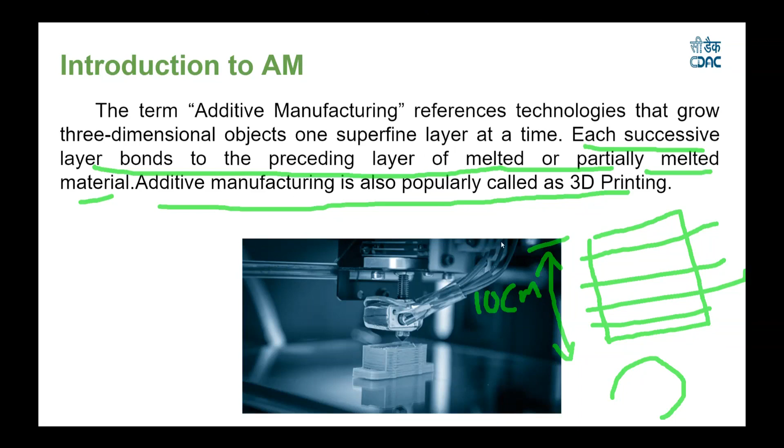So that's what additive manufacturing is like: a layer by layer manufacturing process where each layer gets printed on top of the other, melted or partially melted. After printing one layer, it solidifies within a fraction of a second, then the next layer gets deposited on the previously printed layer, and the process continues until the complete model gets built.

Coming to the evolution of additive manufacturing: it was evolved between 1984 and 86 by Charles Hull, founder of the company 3D Systems, a pioneer in desktop or industrial grade polymer printing, meaning thermosetting or thermoplastic polymers. He founded 3D printing through the technology called stereolithography, which is a photopolymerization technique.

Here you use a liquid resin, a thermosetting polymer resin, as raw material, and a UV light source or high intensity light as the solidification source. You project that light onto the liquid resin, and in that way the resin gets solidified. So additive manufacturing was founded between 1984 and 86 by Charles Hull, who is also the managing director of 3D Systems company.

So in 1992, they built the first 3D printer. In 1999, they started using 3D printers for medical applications. Then in 2000 they printed the miniature of a kidney using a 3D printer.

In 2006, the patent that was filed in 1984 expired after 20 years. So from when the patent got expired, there was a large boom in additive manufacturing.

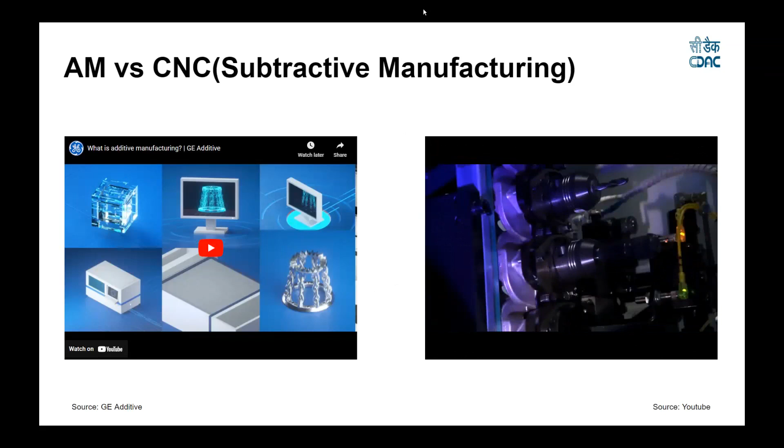If you see a part like this, it's not at all possible unless you go for multiple conventional manufacturing processes. Those kinds of parts which are very intricate in shape can be 3D printed easily. That's the major advantage when going for the additive manufacturing process.

So we cannot say that additive manufacturing can replace subtractive manufacturing, but it can add value when there are complex parts which you are going to manufacture.

Here you can see the differences between the additive manufacturing process and CNC or conventional manufacturing process. In additive manufacturing you develop the model layer by layer by adding material. In conventional manufacturing you remove material from a chunk or block.

Here material is added as the part gets built. Here material is removed as the part gets built. So you have seen both in the video, right?

Here you get more geometrical freedom, whereas in conventional manufacturing we have less geometrical freedom compared to additive manufacturing. Here you have no wastage of material or very less waste of material, whereas here you have very high waste of material, as you have seen.

So we have to remove the material to get the desired shape of the object.

Additive manufacturing is suitable for low volume production, while conventional manufacturing is suitable for higher mass production. The manufacturing rate of additive manufacturing is very low, as it's still in the development stage, so it is less compared to the conventional manufacturing process.

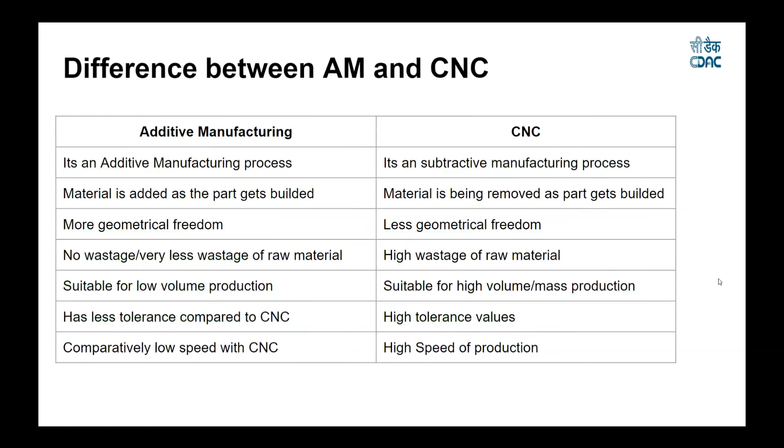Now looking at the advantages, the first advantage is lead time reduction. When you are going for any kind of product development, in the process of design iterations, it requires a lot of time to get the part in hand with conventional manufacturing process. But when you adapt the additive manufacturing process, you can print your part within no time.

If your design is ready by end of the day, you can start printing in the evening, and by the next morning your part will be 3D printed. In that way, you can reduce the lead time of product development.

Here you can also do topology optimization, which refers to optimizing the weight of the part. There are simulation software where you can optimize the weight of the part without losing any strength parameters, so you can reduce the weight of the part. That is one advantage.

So weight reduction, as I said, and part consolidation. If your assembly has around 8 to 10 parts, with conventional manufacturing process you get more number of parts because of the constraints involved. But when you adapt additive manufacturing in your design cycle, you can consolidate those 8 to 10 parts into 2 to 3 parts, reducing the number of parts in an assembly.

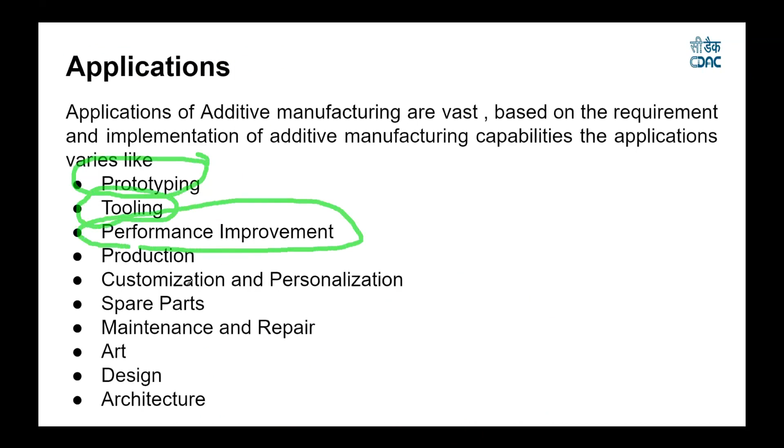You can go for mass customization, you can go for personalization, you can use it for spare part maintenance and repair. Even you can do repair on a 3D printed part, like if a large part got damaged, you can do the DED process - what that is, I will show in the next couple of slides. If there is any broken area in a part, you can deposit the material there, and in that way repair the old part also.

Then you can use it in art, design, architecture. There is no specific industry where we cannot use 3D printing, other than cloth manufacturing or something, but mostly in physical objects you can use 3D printing in all applications. So these are the applications of additive manufacturing.

Next, coming to classification of additive manufacturing process based on ASTM standards, which is our major topic. As per ASTM standard, there are seven different types of additive manufacturing technologies. Among that, we have material extrusion, sheet lamination, binder jetting, VAT photopolymerization. VAT photopolymerization is the first technology, invented by Charles Hull in 1984, as I said. He invented stereolithography, which is based on liquid resin. VAT means resin tank, what we call.

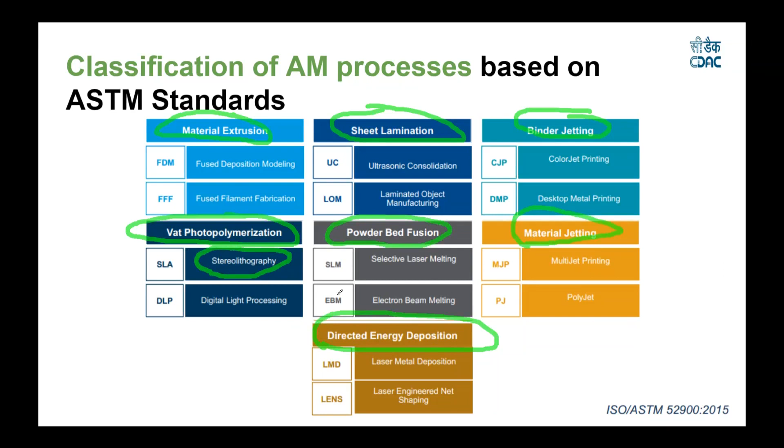Next we have powder bed fusion. Next we have material jetting. Next we have directed energy deposition. So there are seven different types of technology. The building process remains the same in most of the technologies. The major difference between all these seven technologies is the raw material which we are going to use.

If you see here, in material extrusion we'll be using the raw material in wire form. If you are going for VAT photopolymerization, we use raw material in resin form, in liquid form. If you are going for powder bed fusion, we'll be using raw material in powder form, like metal powder. Based on the raw material, we have to choose a suitable solidification source to develop a 3D model. In case of material extrusion, we'll be having material in wire form, we'll be melting the wire and depositing it in a layer by layer process.

When you're going for vat photopolymerization technology, you'll be having a raw material in resin form. To cure that resin, we require a solidification source, either a high intensity laser or UV light. Since thermosetting polymers are light sensitive, when you're projecting the light on that liquid area wherever you want to build the part, it gets solidified. So in that way you'll be developing the part.

If you go to powder bed fusion, since we are using metal powder, it is selective laser melting or electron beam melting. Here we'll be using a laser, like a CO2 or fiber laser or some other lasers, to solidify. In electron beam melting, you will be using an electron beam to melt the powder and solidify it.

So in every technology, the build process remains the same. You'll be having a material that gets deposited on a build platform, it gets solidified, and the build plate will be lowering, and on top of that, the next layer will be deposited. The process continues similarly in all the technologies. Just the raw material we use and the solidification source which solidifies the part will be changing. That is the major difference between all seven technologies.

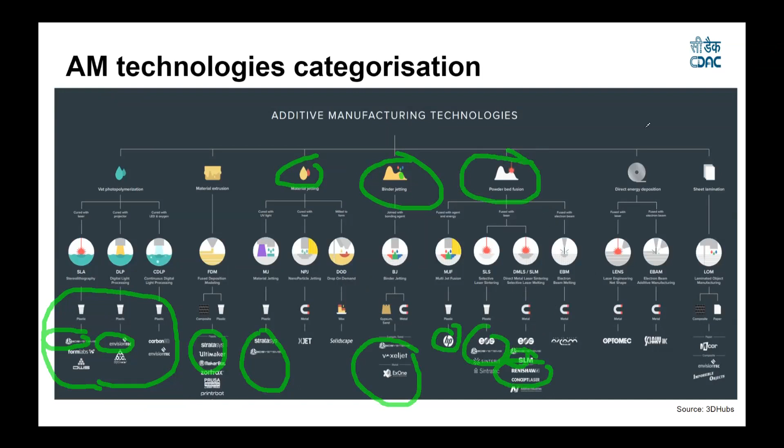For binder jetting, we have Voxeljet and ExOne. These are the printers which can use sand also as a raw material, and these are the pioneers in that technology. Next, powder bed fusion, we have HP, EOS, 3D Systems, SLM, Renishaw. These are the pioneer brands in the technologies. Similarly, we have DED and sheet lamination.

Starting with material extrusion: as I said, we'll be having a raw material in wire form. In the material extrusion process, you'll be having a raw material which we call filament. We'll be having a roller which will be pulling the filament inside towards the nozzle. The nozzle is the area where you will be having a thermocouple which will be heating the filament.

Based on the filament type, there are different types of filaments, it will heat the filament in the nozzle and deposit it wherever it is required. This is what happens in case of FDM, fused deposition modeling, or in some brands like Ultimaker, they call it FFF, fused filament fabrication. So the filament is getting inserted, pulled inside, melted, and deposited.

Fused deposition modeling, or FDM, is a layer additive manufacturing process that uses production-grade thermoplastic materials to produce both prototype and end-use parts. This technology is known to accurately produce feature details and has an excellent strength-to-weight ratio. FDM is ideal for concept models, functional prototypes, manufacturing aids, and low-volume end-use parts. The FDM process begins by slicing 3D CAD data into layers. The data is then transferred to a machine, which constructs the part layer by layer upon a build platform.

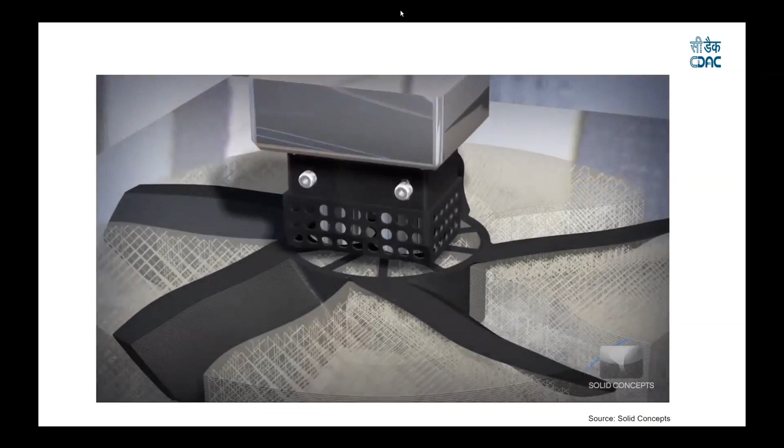Thin thread-like spools of thermoplastic and support material are used to create each cross-section of the part. Similar to a hot melt glue gun, uncoiled material is slowly extruded through dual heated nozzles. The extrusion nozzles precisely lay down both support and thermoplastic material upon the preceding layers. The extrusion nozzle continues to move in a horizontal XY plane while the build platform moves down, building the part layer by layer.

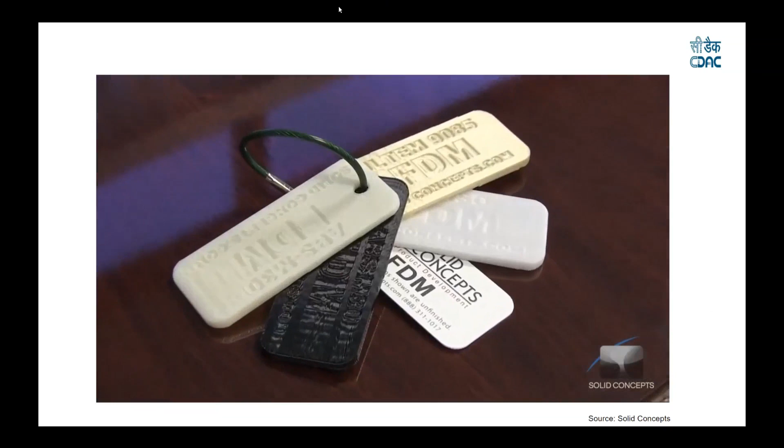The finished part is removed from the build platform and cleaned of its support material. Raw FDM parts have visible layer lines. However, service providers such as Solid Concepts offer multiple finishing options to create smooth, even surface parts including hand sanding, assembly, and cosmetic paint. Since FDM parts are constructed with production-grade thermoplastics, including ABS, polycarbonate, and Ultem, they are both functional and durable. FDM is utilized in a number of industries, including aerospace, automotive, industrial, commercial, and medical.

So as you have seen in the video, that's how the FDM process works. You will be having two different extrusion heads, one for model material and the other one for support material. The white color part which you have seen is the support material, the black color one is the actual model material.

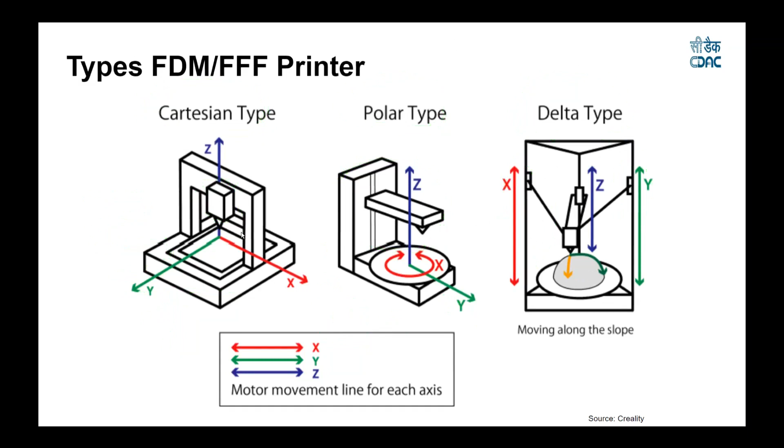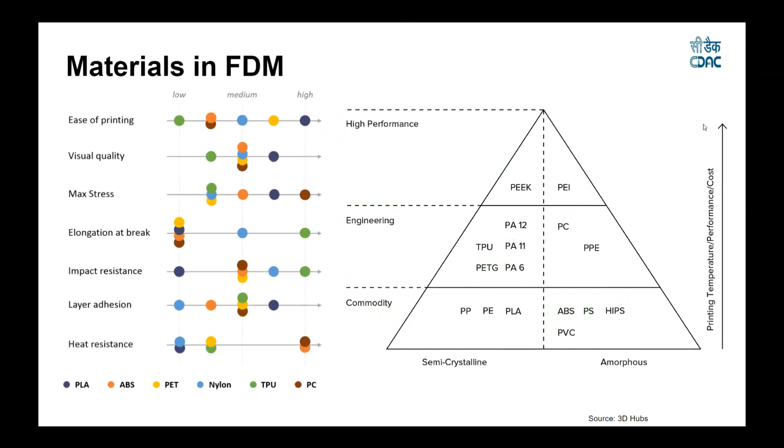Next, coming to VAT polymerization, which is the very first technology in case of 3D printing. Here we'll be using a liquid resin. As I said, the raw material and the solidification source only change, the other setup of the 3D printer will be the same.

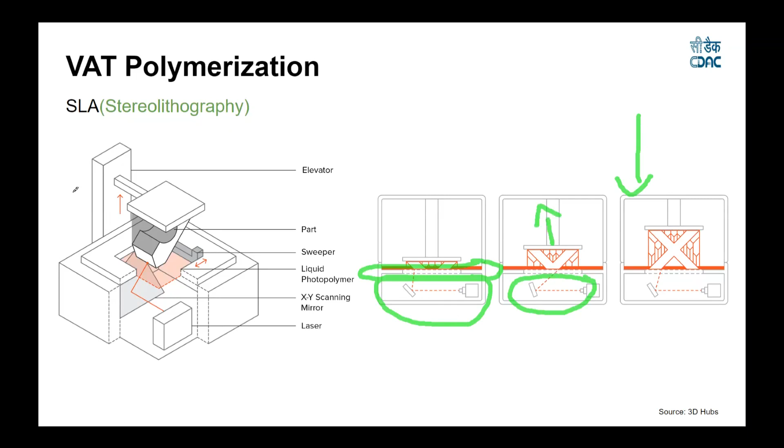Here you can see, there's a high intensity light source at the bottom of the 3D printer, or in some setups it will be on top. In this we also have two different processes, which I'll explain next. You'll be having a liquid resin, the orange color one is the liquid resin we have here. After completing every layer, your build plate will be raising up, and the next layer gets built on the previously printed layer. So this is the printer setup we have, and this is called the elevator.

Next we have the 3D printed part, this is the build platform. Here we have a sweeper, which will be leveling the liquid. Here we have liquid polymer, in orange color, and you will be having XY scanning mirrors, which will be deflecting the light source or solidification source wherever we want to solidify the part, and we will be having a laser chamber here. So this is the setup of VAT polymerization technology.

So here you can see the video of how it happens.

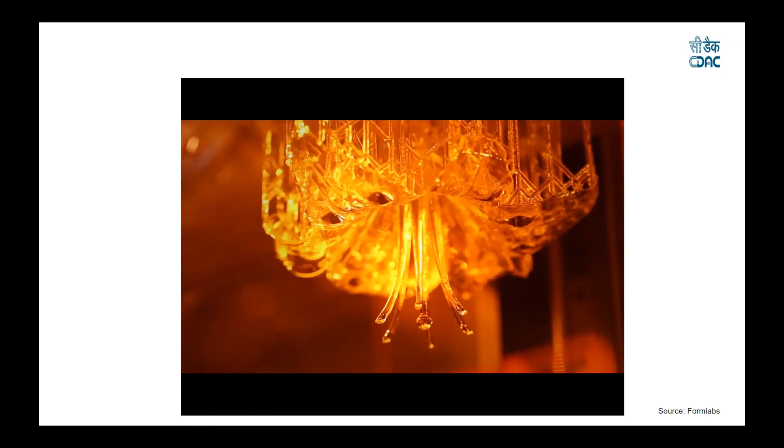The Form 1 Plus is a stereolithography 3D printer. Today, we're going to take a look at how it works and put it to the test against parts from an extrusion-based machine. Let's start by taking a closer look at the printer.

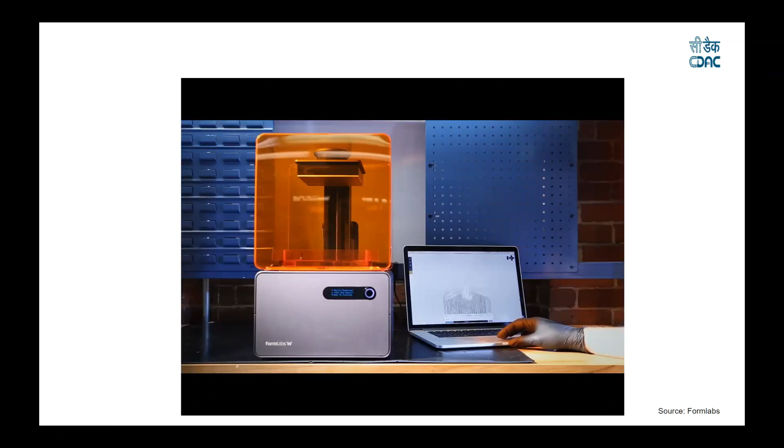When we open up the light-blocking cover, we can see a build platform inside. This metal plate is where the parts are made. Underneath the build platform is a resin tank. This clear window gives the ultraviolet laser a path to cure the resin. To start a print, we'll upload a file and fill up the resin tank to the indicator line.

You can see the laser passing back and forth inside, hardening the liquid plastic.

We'll take our printout and wash it in rubbing alcohol to get the excess resin off. The flower comes with supports on it, and we'll snip them off to finish the piece.

Stereolithography is known for producing extreme detail, with layers down to 4 times finer than a human hair.

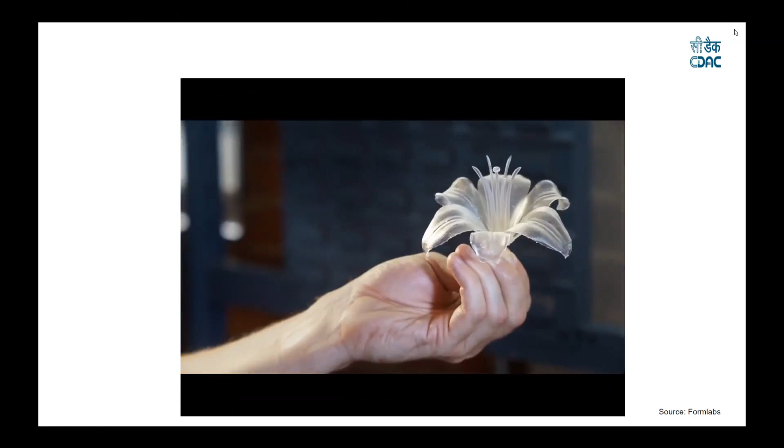The Form 1 Plus lets us take advantage of a library of materials, so we made some other parts to show what these resins can do. A castable resin gives jewelers and engineers an inexpensive way to produce metal parts. This flexible resin is great for simulating different textures, and as we can see, this tough resin can really take a hit.

Now let's compare how the Form 1 Plus parts stand up against a filament printer. The stereolithography parts come out nice and smooth, and we can see the ridges on the cup printed with filament when comparing the FDM and SLA 3D printers.

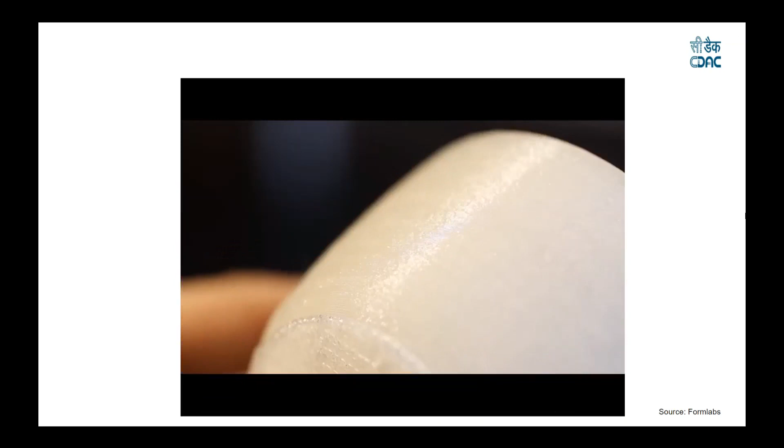When we break this sample piece, you can see that filament parts quickly snap along the layer lines. The SLA process creates a chemical bond, so our prints take much more force.

This is a bottom-up type of 3D printer. Today we took a look at how stereolithography printers work, the types of resins they can print with, and what makes the parts stand out against other desktop machines.

So as you have seen, this is how the SLA type of VAT polymerization works. A layer of liquid resin will be deposited and solidified using high intensity light, and the next layer gets deposited again.

Your build plate will be lowering down, or it will be going up, based on the printer setup we have. In some 3D printers this is top down, where your build plate moves from top to bottom with the laser setup on top, and in some printers it's bottom up. Here the build plate moves in the upward direction after completing every layer, with the complete laser setup at the bottom. Now I'll show both 3D printer types.

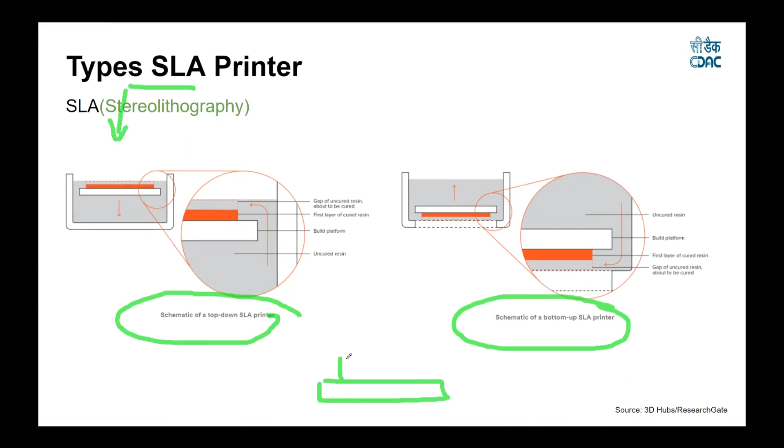So here you can see one is top down 3D printer, one is bottom up 3D printer. In top down, you have a laser setup at the top. After completing each layer, consider this is your build platform and this is your model. After completing one layer, your build plate goes down, the recoater spreads the next layer of liquid resin, and the solidification source solidifies wherever required. It continues this way until the product gets built. That is what happens in top down.

Coming to bottom up, it's mostly the same setup, but here this is your build platform, and this is your model after completing a particular layer. Your build plate lifts up within the resin tank itself, which is full of resin. The next layer gets solidified by the light source present at the bottom of the 3D printer setup. In this process, your complete model is submerged inside the resin tank. That is the main difference between top down and bottom up.

So here we can see the major differences between bottom up and top down. Bottom up type 3D printers are low cost and widely available, while top down technology has very large build size. Build size means the platform on which the 3D model is developed. Bottom up printers have less build area compared to top down. Top down has very high build area and faster build times.

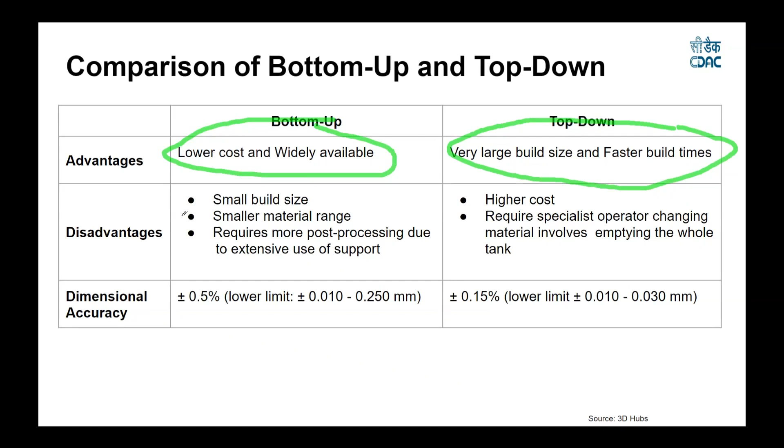Disadvantages of bottom up: it has smaller build area, so you cannot build large models. Next, it has a smaller material range, since these are cheap printers we don't get a wide material range. It also requires more post-processing time due to extensive use of support.

In this bottom up type, since your model is lifting from bottom to top, consider this is your build platform on which your model is built, you are moving against the gravitational force. So to hold the model to the build plate, we need more supports, which requires more time to remove the supports too. That is a major drawback of bottom up type, along with not having higher build area.

That is one more reason, because if you have higher build area, you can print larger models. To stick larger models in bottom up type, it has to use extensive support to hold those models to the build platform, which requires a lot of support, and in return increases the post processing time.

So that is a major drawback, which is why we don't have higher build areas when going for bottom-up type 3D printers. In top-down, we have disadvantages like higher cost since it has a larger build area. The cost of the printers will be high, and we require a specialist operator for operating these machines, because we have to store the material properly and preheat it before 3D printing. So all those challenges we have, and we require a specialist operator.

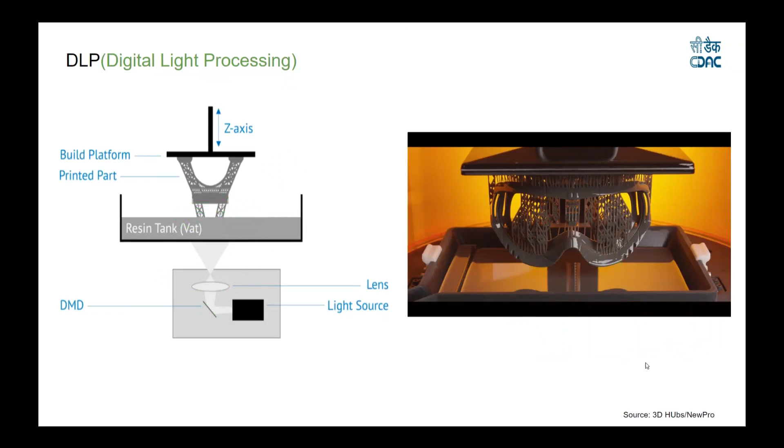The rest of the construction will be the same, as it too has top-down and bottom-up types. This is a bottom-up type, and the other one has top-down. The raw material and the solidification source will be the same, but here you will be solidifying the complete layer in a single go. So you'll get a faster build, but the quality will be less when compared with SLA technology. Now you can see the video here.

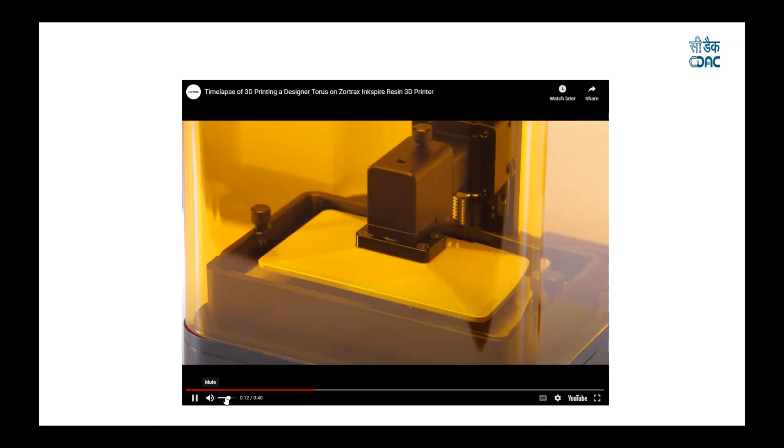This is a bottom-up type of printer, and this is the liquid resin being poured. The build platform will be dipped inside the resin tank and will be lifting up. Here you can see in the video we have a lot of supports holding the part, since we are lifting it against the gravitational force, so we have to do a lot of post processing as well.

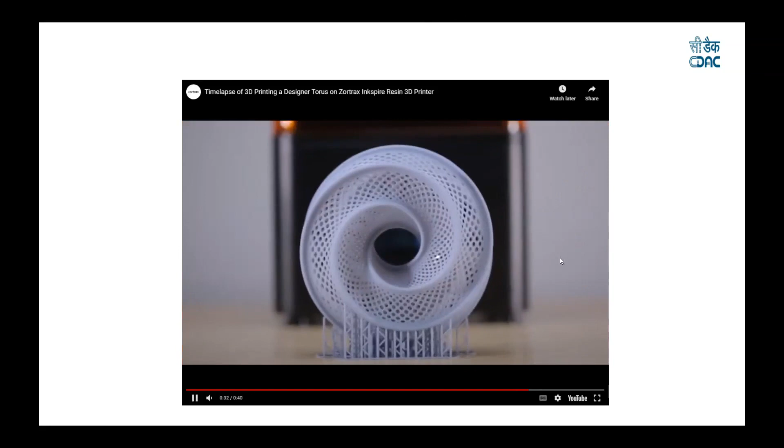That's how the process happens in DLP. The construction of the 3D printer will be similar to the SLA process itself. Only the projection of the solidification source will be different; the rest of the things will be the same.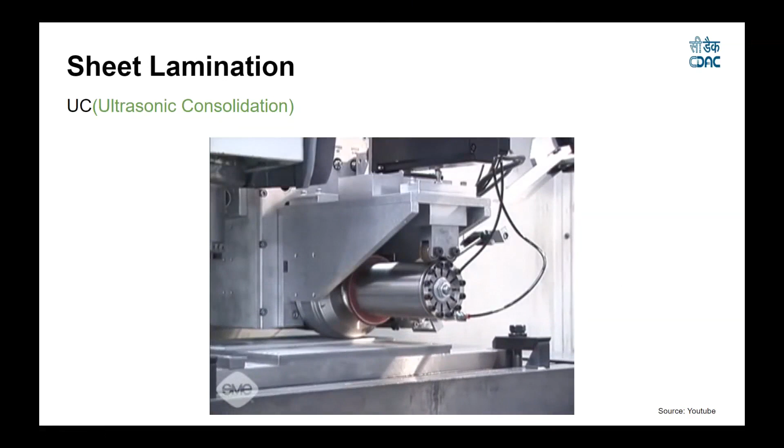Ultrasonic consolidation produces direct metal parts from CAD data by ultrasonically welding layers of coiled aluminum foil strips to a prepared metal substrate. As the foil strips are placed on the substrate, a tool called the sonotrode uses high-frequency vibratory energy and moderate force to disrupt the interface surfaces, inducing interatomic attraction and metallurgical bonding between the foil and the substrate surfaces. Once ultrasonically welded, the layer is then milled to the cross-sectional shape defined by the CAD data.

This process removes material through a general conventional manufacturing process. The wastage of material is more, but you can get the detail of a previous layer or complex parts when going for sheet metal lamination or ultrasonic lamination, removing excess material continues until the part is complete.

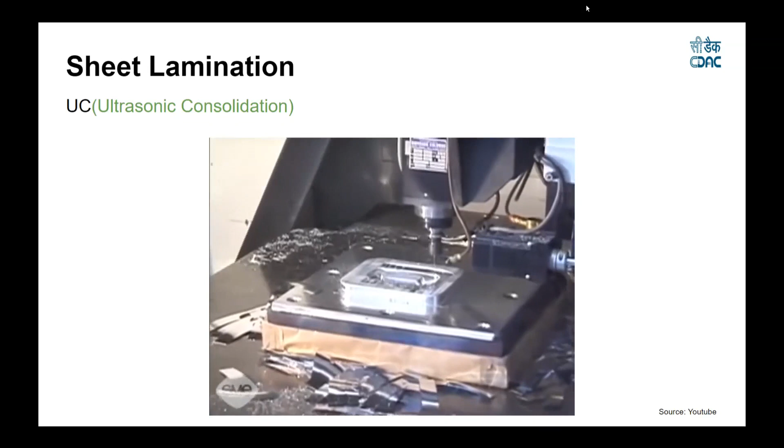Like other rapid prototyping processes, ultrasonic consolidation also allows for the buildup of complex geometries, overhangs, and enclosures within a part. Ultrasonic consolidation can be used to bond a variety of similar and dissimilar metals, as well as certain ceramic metal combinations.

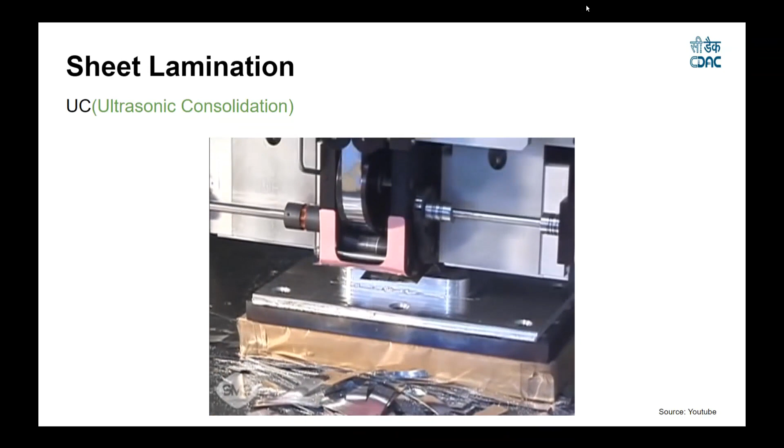As you have seen, it is a combination of conventional and additive manufacturing process. Here the sonotrode deposits the metal sheet, then it is milled wherever required. If you compare conventional manufacturing and additive manufacturing, here you can get complex geometries, but the waste of material remains the same. That is about sheet metal lamination.

Next we have sheet metal laminated object manufacturing. It is also similar, but here you use a laser to cut the part wherever it is required. You can see in the video.

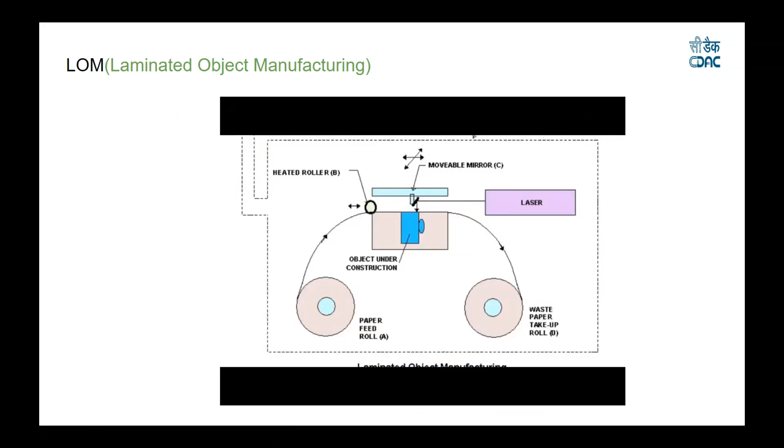This is the construction of the laminated object manufacturing machine. Here you will be cutting the material wherever it is required, and that way your complete model is built.

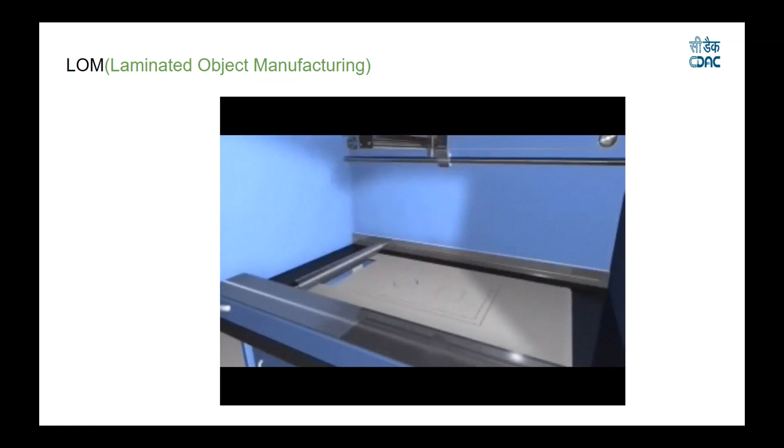After completing one layer, the next layer of sheet metal paper is shifted onto the previous printed object, and the process continues until your complete model gets developed. But here the wastage of material will be the same as in sheet metal lamination - the wastage will be more, but you can also achieve critical geometries when going for sheet metal lamination.

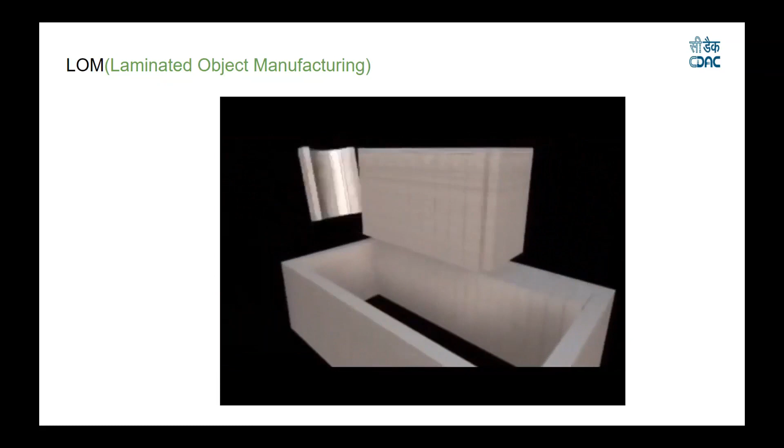So in this process, the laminated object manufacturing process works similar to sheet metal lamination.

Next, coming to powder bed fusion. This is one of the widely used technologies for metal additive manufacturing process. In that we have two types: one is selective laser melting, SLM process, and we have one more called EBM, electron beam melting.

The construction of the 3D printer remains the same, as you can see. Here you will be having a build platform which will be raising up and lowering down after completing every layer. Here we have the dispenser duct, where it will be having the raw material. After completing every layer, this recoater will be spreading the material on the build platform, and excess material will be dumped here into the collector tank. Then the next layer will be solidified, and after completing one layer, the next layer of powder metal will be deposited by the recoater.

So here you have the solidification source. We are using laser as the solidification source, either it might be CO2 laser or other lasers. And here you have a scanner which will be deflecting the laser direction wherever you have to solidify the part. We also have to maintain inert gas inside the chamber, either argon or other inert gases. So this is the construction of the SLM process.

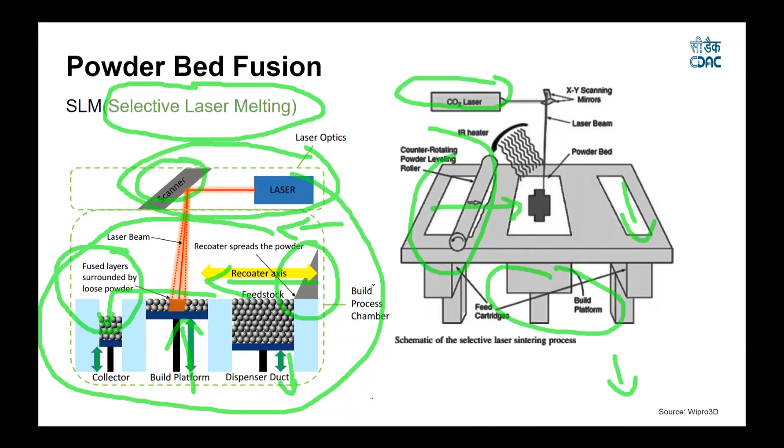Here you can see we have a CO2 laser. This is the recoater we have, which will be spreading the material, and this is the collector tank where it will be collecting the excess material after completing one layer. This is your build platform which will be getting down such that the next layer of powder can be deposited. The process continues until the complete metal part gets 3D printed. You can see in the video.

So this is the slicing software we have. We are importing the STL file, and after importing it, we have to set all these parameters, like what kind of supports you want. Here we have support definition, optimization, all these things. You'll be learning that in detail during GD&T training or bridge course.

So you can multiply the parts also inside the slicing software, and you can arrange the parts on the build platform. You can arrange the support structure, whatever kind of support structures you want. So this is the construction of the 3D printer.

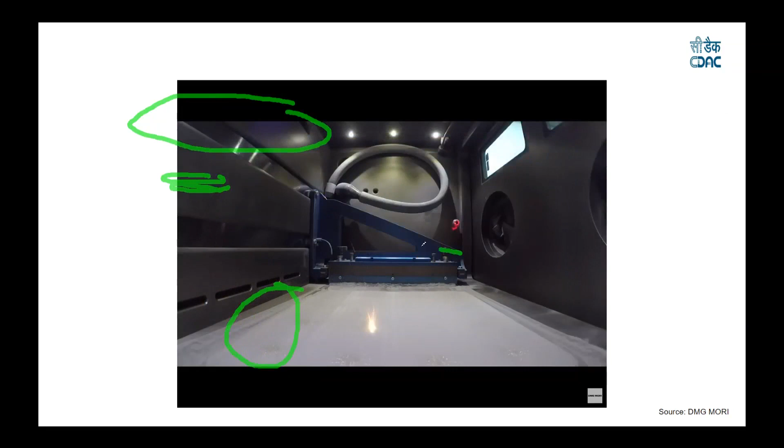So here you can see, after completing one layer, your laser is curing the part. As we have multiple parts, the laser moves to every point and solidifies it. After completing one layer, this is the recoater we have here, where we have excess powder, and it will be spreading material on this platform.

So here we have to maintain the inert gas inside the chamber, it might be argon or other inert gases. So after completing one layer, your recoater is spreading the powder here, you can see.

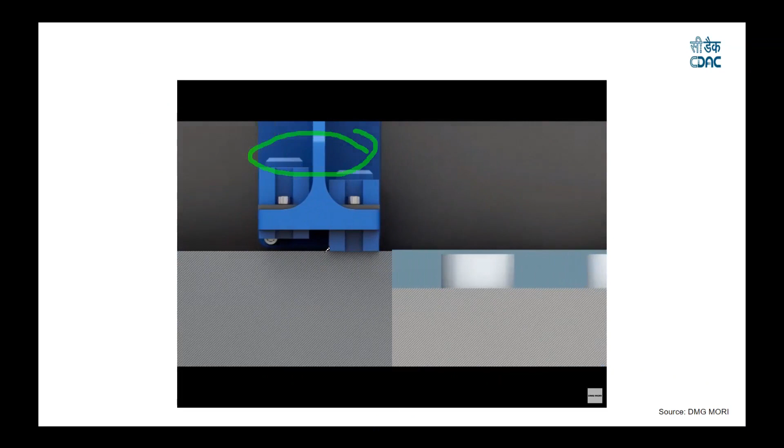The collection tank we have, so this is a dual type, but in recent 3D printers we have a collection tank on the other side itself, so that it can optimize the travel time in the other direction. So here it is spreading the powder.

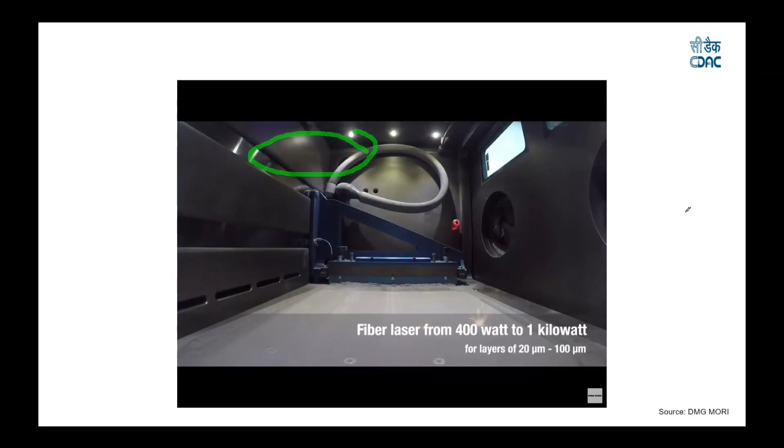You can see in the video how the part is going. So here you are using a fiber laser which is of 400 watts to 1 kilowatt, based on the raw material or powder you are going to use.

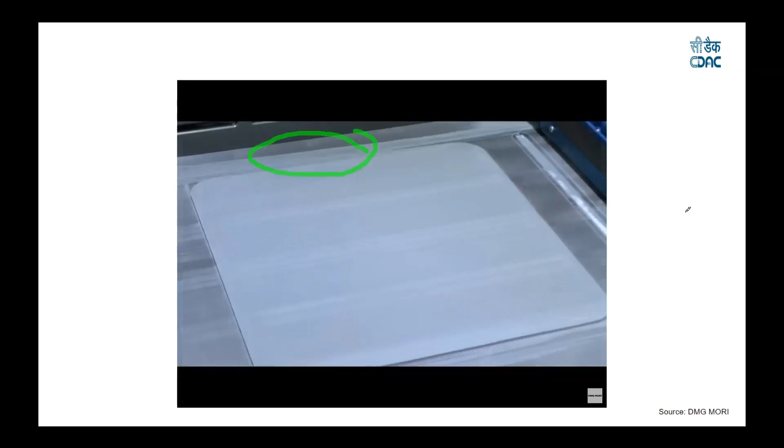After completing, we have to remove the powder using those slots we have, and we have to take out the part. So you can reuse the part, reuse the powder also.

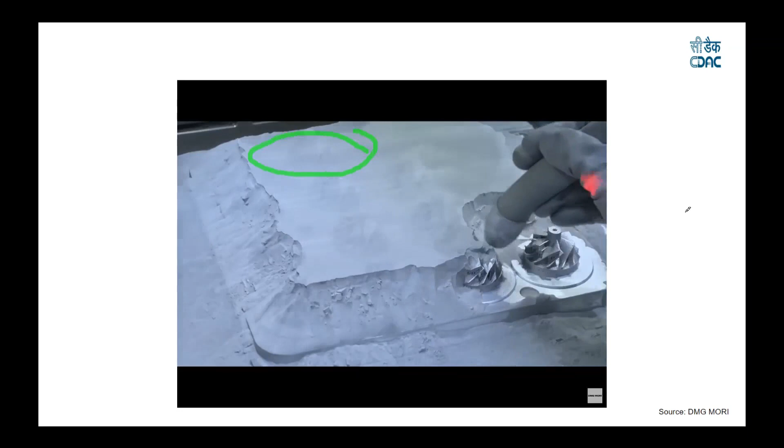So you have to be careful when you are removing the part, because those powder particles will be very nano, like very few microns, so it might enter into your nose and you can inhale that. So you have to take precautions, like using a 3M mask or other things.

So those are the support structures we have. Later on you can do post processing on these 3D printed parts. You can remove the part from the build plate, and this is the build platform, and you can do wire cutting and other operations to remove the parts from the build plate. So these are the parts we have. So in that way, the SLM process works.

Next, here you can see the solidification source we are using is a laser beam, like either it might be a CO2 laser. Next we have materials, so we have a vast number of materials, but mostly these are aluminum, titanium, cobalt chromium, or inconel or other materials we'll be using. Next, feeding mechanism, here we have a recoater as the feeding mechanism as you have seen in the video. For atmosphere, we have to use inert gas, either argon or nitrogen.

Next, layer thickness, we can print from 20 microns to 100 microns, that is 0.02 mm to 0.1 mm. That's the precision you will be getting when going for metal 3D printing. Next, the laser spot size is like 50 microns to 500 microns. The maximum build area we have in present 3D printers is 500 by 500 by 500.

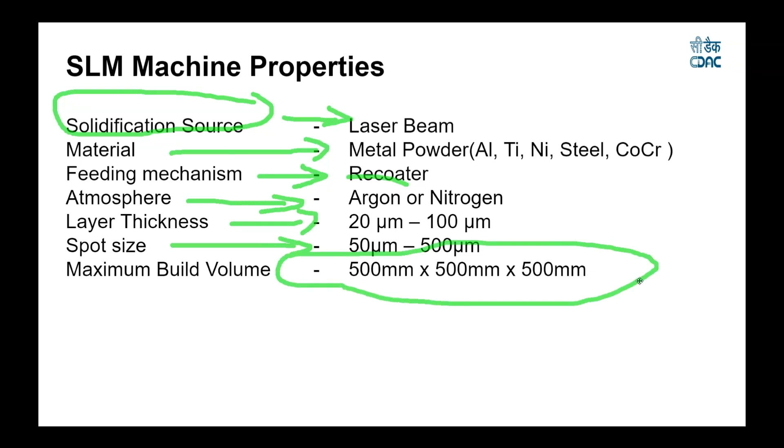If you want to print a larger build platform, you can go for a DED process, or you can split your model into two parts, 3D print them, and then go for a conventional welding process. So these are the specifications of the SLM machine we have.

Next, coming to the EBM process. As I said, SLM and EBM both have a similar setup to what we have in SLA and DLP, only the solidification source is different. There we have a high intensity laser, here we are using an electron beam as the solidification source, and we have to maintain inert gases.

Either argon or nitrogen inside the chamber. Here we are going to use vacuum as the chamber gas instead. The other construction will be similar - here you have a dispenser and a recoater where it will be spreading the material. So this is the construction of EBAM, that is electron beam melting.

So you can see in the video it is mostly similar, you can hardly notice the difference. The only difference is the solidification source.

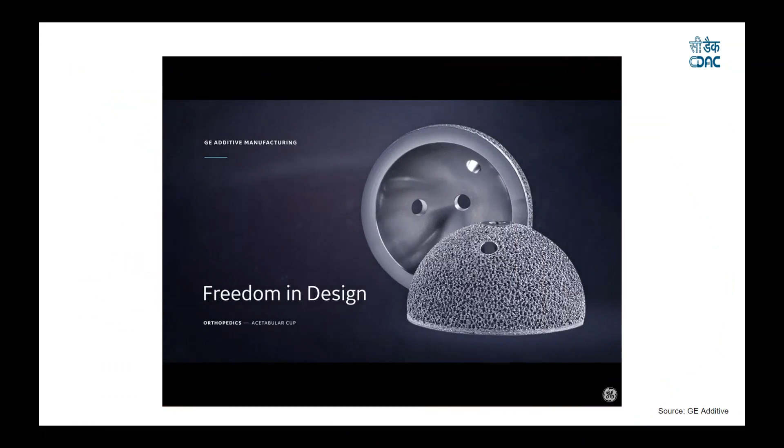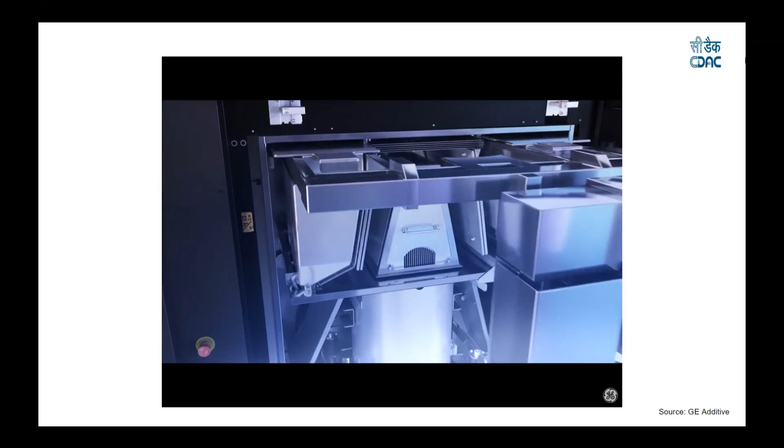Additive manufacturing offers greater freedom in design and allows for the creation of optimized parts not constrained by the limits of traditional manufacturing. Arcam EBM has the unique ability to tightly stack parts within the build to increase productivity. An optimized build file is sliced and loaded into the Arcam EBM system. Metal powder is then loaded into the machine, the build chamber is closed, and a vacuum is created to ensure a clean, controlled environment for processing reactive materials.

Arcam EBM's powder layering system evenly distributes a thin layer of powder on the build area. A powerful 6-kilowatt electron beam heats the powder bed to the required optimal ambient temperature and then proceeds to melt the powder - first contour melting, then hatch melting. Contouring defines the perimeter of the part, and the hatch is the internal area.

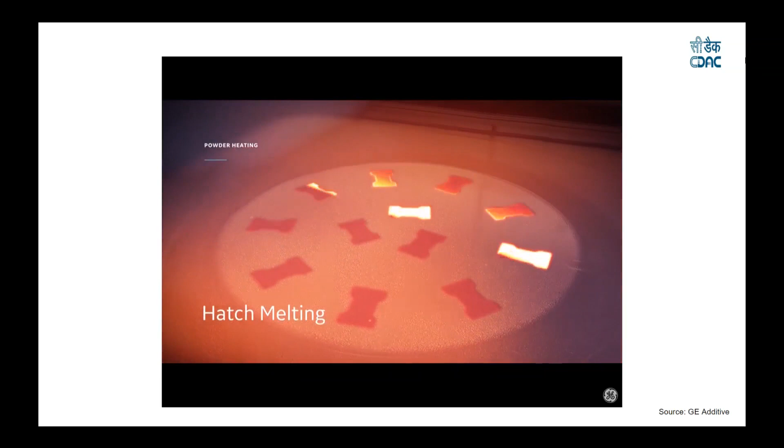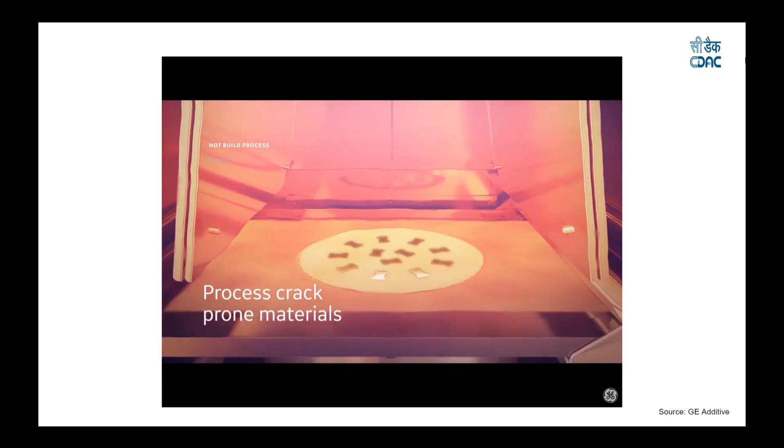The unit generating the beam contains no moving parts, allowing for extremely fast and accurate beam control. The build environment is kept hot, reaching temperatures exceeding 1000 degrees Celsius, resulting in no residual stresses and allowing for the processing of crack-prone materials. As each layer is completed, the build platform is lowered and a fresh layer of powder is raked over it. This process repeats, growing the build one layer at a time. When the build is complete, the tank is extracted and the Arcam EBM machine is prepared for the next build.

So that's how the EBM process works, which is similar to the SLM process.

So coming to the specifications of the machine. Here we are using electron beam as the solidification source, whereas in SLM we use laser as the solidification source. The materials are similar to the SLM process, along with similar feeding mechanism and recoater.

For atmosphere, in SLM we use inert gas, but here we use vacuum. Layer thickness we have is 50 microns to 200 microns, but in case of SLM we have 20 microns to 100 microns. Here the layer thickness is more, so we cannot print much finer parts compared to the SLM process.

Next, beam spot size, which is from 140 microns to 250 microns, and the build area is 250 diameter into 430. So these are the machine properties of the EBM manufacturing process.

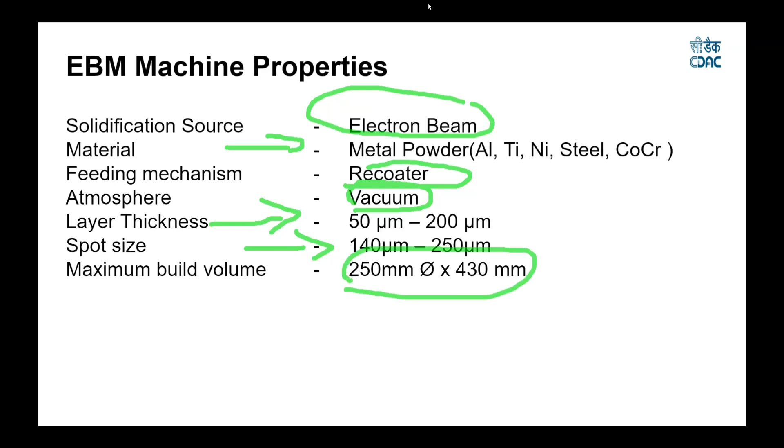So these are the different materials we have, which are similar for both SLM and EBM. We have different compositions in aluminum, we have different compositions in titanium, we have Inconel 718 which is mostly used, and we have cobalt chromium. So these are the materials we have, and based on requirement we can choose our material.

And if you want other metals, you can use technology in material development also, using different combinations of materials.

So here we have DED, that is directed energy deposition. This is similar to the SLM process, but the major difference is that SLM has a restricted build area, whereas in the DED process you won't have any build area limitation - here it is like a robotic manipulator which we have.

So it will be moving in all directions. Here you will be having a rotary table, and you will be having a laser beam at the center, and powder will be depositing from the sides. In that way you can deposit material wherever required, and you can print large parts, but the quality won't be as great compared to SLM and EBM process. Later you can do post processing. So this DED process will be mostly used for repairing a part or when you're going to print larger parts. So this is the construction of the printer.

So here we have the laser setup, where we will be putting the laser from the manipulator. This is a gas chamber, from where you will be getting the inert gases. This is a build platform, you will be having a rotary table, and this is the motion control unit. So this is the construction of the DED machine in case of LENS.

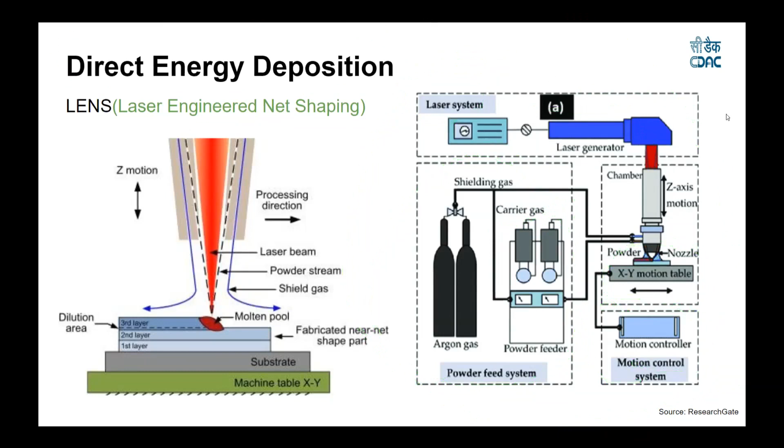And we have one more technology similar to EBM also, we can see that also. Here you can see the solidification source is a high intensity laser beam, similar to SLM, and a powder jet. There we have a feedstock mechanism as a recoater, but here we'll be using the powder directly with a robotic manipulator. It will go wherever required, spreading the material, and curing it. The atmosphere is powder jet shielded with inert gas, similar to how we require inert gas in SLM, so our raw material or solidification source is shielded with inert gas around it.

Next, we have materials. Compared to SLM there are fewer materials, but we have a sufficient number even in the DED process, like metal, ceramic, and multiple materials in different combinations. Next, maximum build area is 1200 by 800 by 800, but in case of SLM it's 500 by 500 by 500. That is a major use of the DED process - you get higher build areas, you can use it for repairing parts and printing larger parts. That's the reason why we have DED technology. The deposition size is 800 microns to 2400 microns. So these are the machine parameters of the LENS machine, that is laser engineered net shaping.

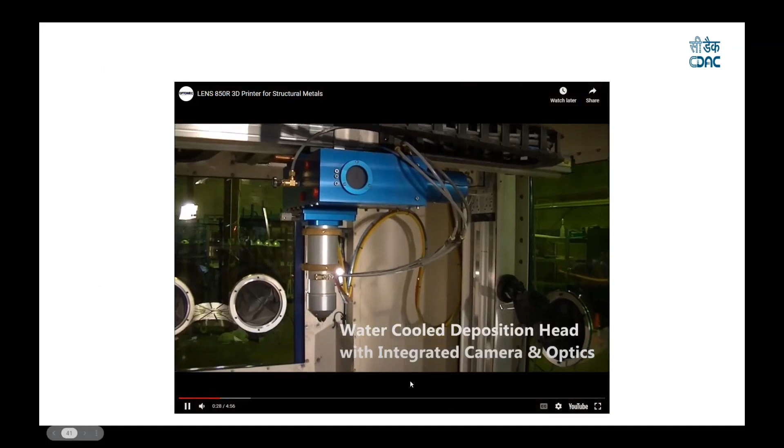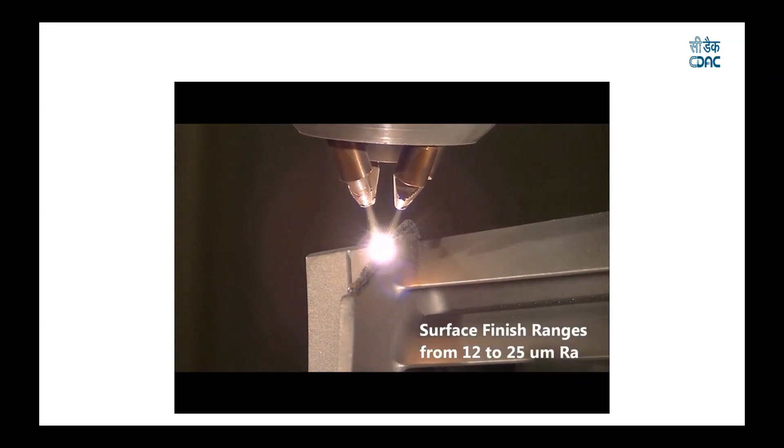So this is how the process works. Here you will be having a powder jet of raw material, and a high intensity laser shielded with inert gas, and it will be solidifying the part. Surface roughness ranges from 12 to 25 RA.

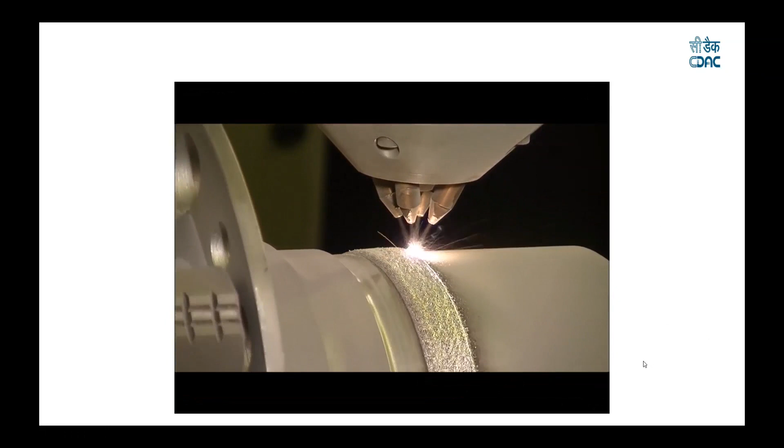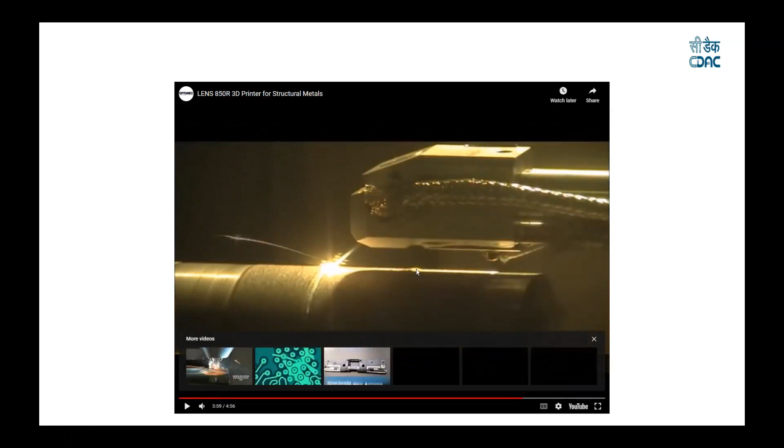We can see here we have a quad laser, with 4 lasers. It will be depositing the metal wherever required, and it will be solidifying that, and the process continues until the complete model is built. This can also be used for laser cladding, where you repair parts. So that is regarding LENS.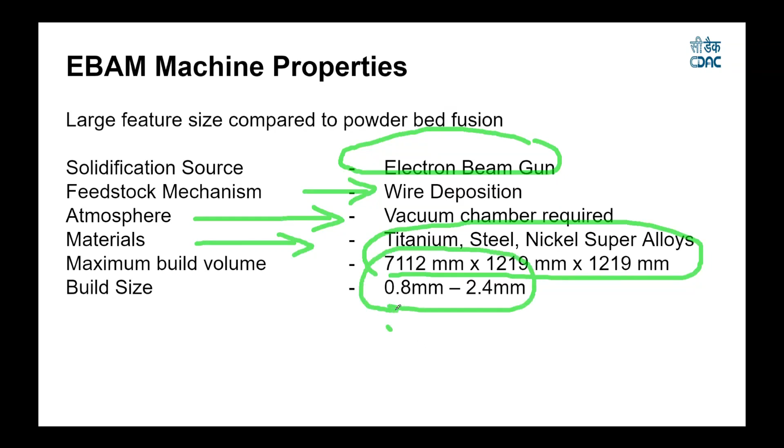In case of DED, that is direct energy deposition, Sciaky is a pioneer in this technology. They print large turbine blades and similar parts using EBAM technology. Here the build size, like a laser spot size, is 800 microns to 2,400 microns. This is the construction and machine properties of EBAM. You can see the video, but the surface roughness is very bad compared to other Sciaky exclusive processes in terms of time and cost.

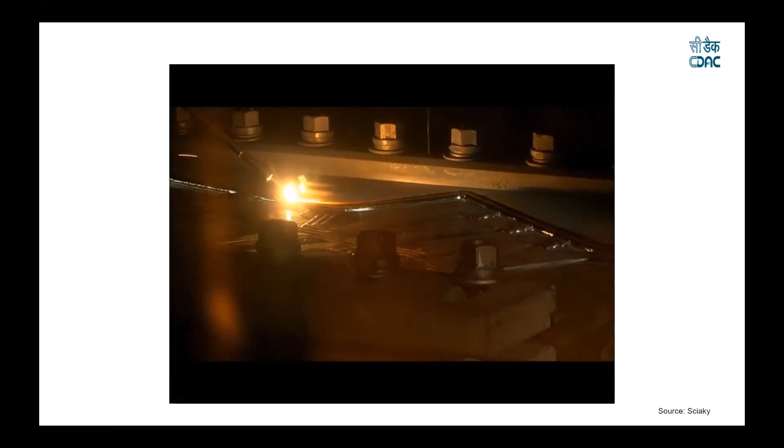Electron beam additive manufacturing, or EBAM for short, metal 3D printing is not limited by part size, material, or geometry. You can manufacture parts and structures that exceed 19 feet in length, 4 feet wide, 4 feet high, and 8 feet in diameter, made from virtually any metal, including Inconel, stainless steels, and refractory alloys like titanium and tantalum.

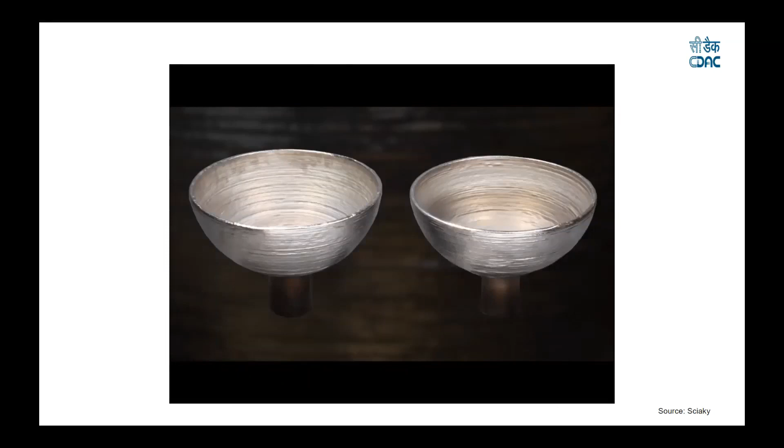How does the EBAM process work? Starting with a 3D CAD model, the program runs on a rotary table. An articulated moving electron beam gun deposits metal from wire feedstock layer by layer until the part reaches near net shape and is ready for finished machining. Later you can do the machining.

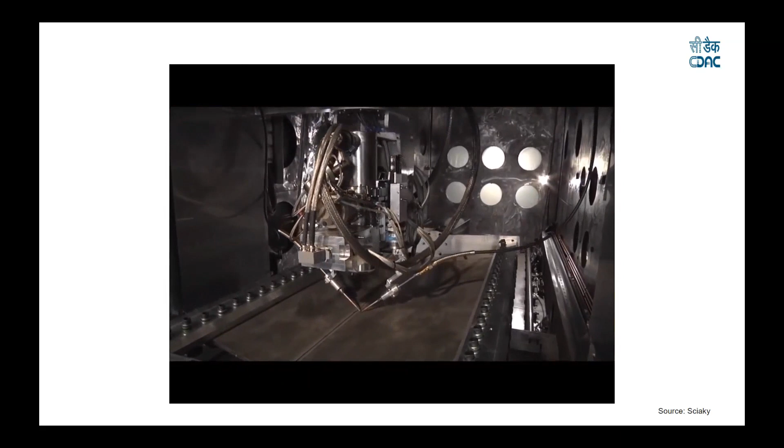Deposition rates can range from 7 to 20 pounds of metal per hour, which is significantly more efficient and cost effective than selective laser sintering processes that utilize messy powders. In addition, a dual wire feed system can be utilized with the EBAM process to increase deposition efficiency, as well as to easily switch to different deposition materials. Whether you need to produce a functional prototype or a run of production parts, the possibilities are virtually endless.

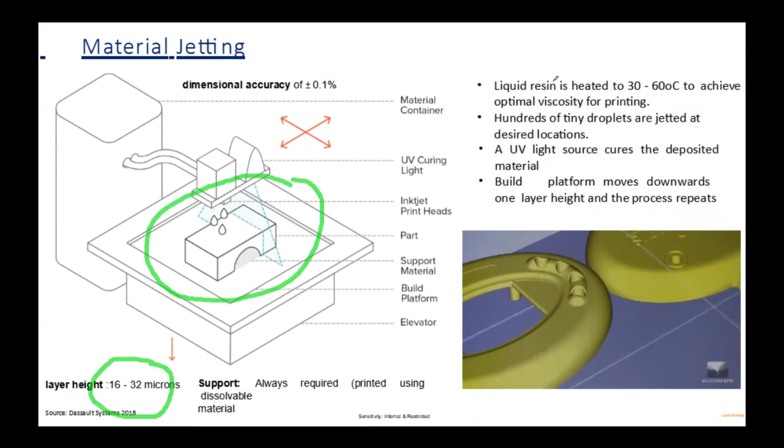EBM process. Next we have material jetting, which is similar to the SLA and SLM processes. You'll be having a powdered raw material, which will be in the 16 to 32 micron range. Liquid resin is heated at 30 to 60 degrees to adhere.

What happens here is a powder raw material will be deposited, and on top of that your material will be deposited, which is between 30 to 60 degrees centigrade, and it will be subjected to a UV light source which cures the resin. In that way your complete model will be printed layer by layer. After jetting the material, your build plate will lower by the layer resolution which you define, and after that your next layer will be recoated and material will be jetted so that it solidifies the part. That process continues, as you can see here.

Here we have the material container, from where the material comes, and you will be having a UV curing light, and inkjets similar to our normal printers, and a part support material, build platform, and elevator. This is the build platform we have. So this is the construction of material jetting technology 3D printers. You can see the video next.

So the material is being jetted from the ink heads, and your UV light will be solidifying the part. After that you can remove the part. Whichever is the clean part or the actual part is there, you can use it. The other support material part you can throw away.

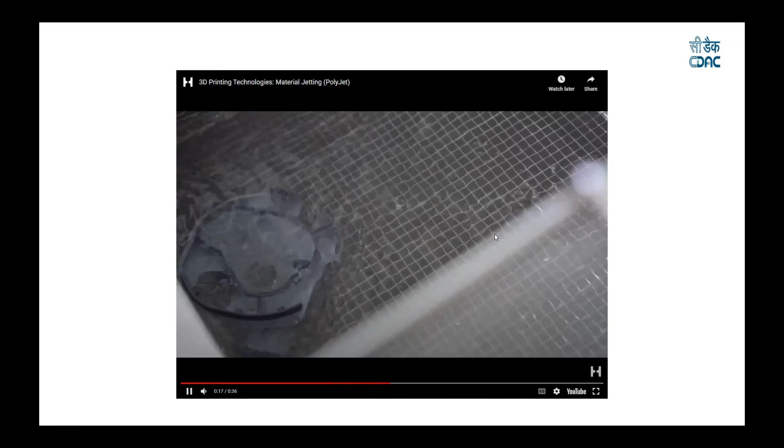This is a curing chamber. If the material is partially cured, you will keep it in a curing chamber where you will have UV light in all 360 degrees, and it will solidify that. In that way your material jetting process will be working.

So the parts in black color are the actual part, the white color part is the support part. The printhead deploys both materials - it deposits the support part and the model part.

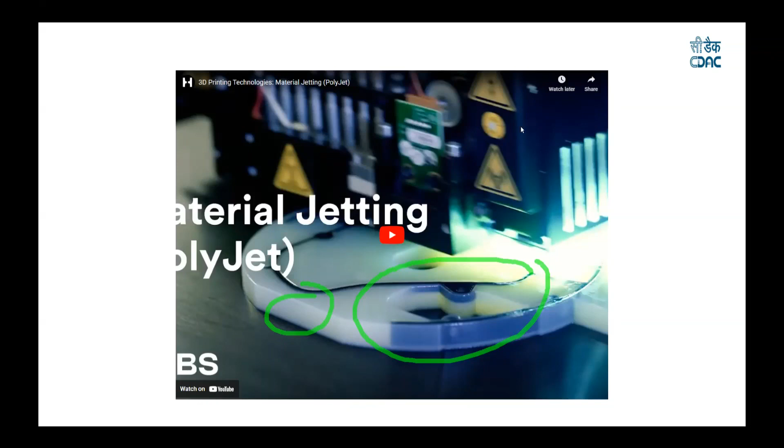After deploying, a UV light will solidify that. After completing one layer, it goes down and the next layer is jetted. This process continues until the complete object is built.

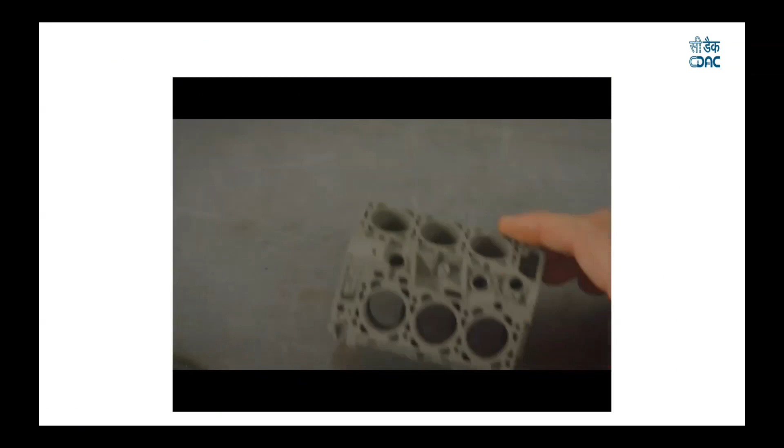Binder jetting additive manufacturing is a process inspired by the technology of inkjet printers. In this process, a liquid binder is selectively deposited on a powder bed with a printhead. It is a growing process that allows production of parts for manufacturing, medical, and dental industries. This technique enables production of metallic and ceramic parts as well as sand molds for castings.

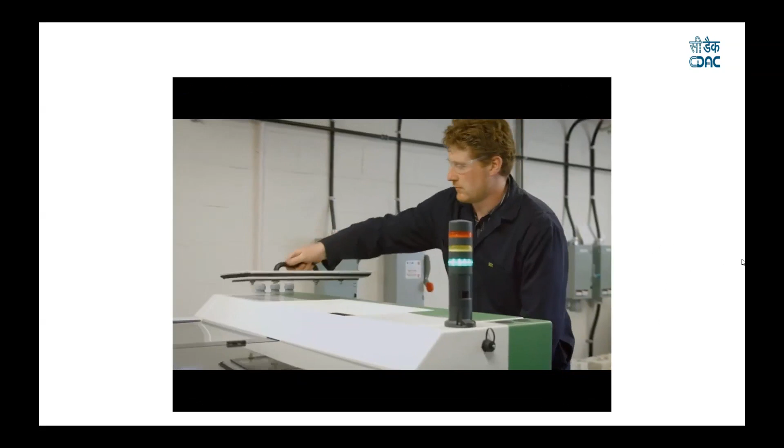To start the process, a 3D drawing is imported into the printer software, similar to other technologies. The powder to be used for the 3D model is placed in a dispenser, which ensures a constant supply during printing. First, a recoater spreads a powder layer of specific thickness.

Thereafter, the printing head, moving on 2 axes, projects the binder where necessary. Before moving to the next layer, the solvent contained in the binder is evaporated by an incandescent lamp. The powder bed is then lowered and a new powder layer is deposited. The production takes place in a series of steps that build the part layer by layer.

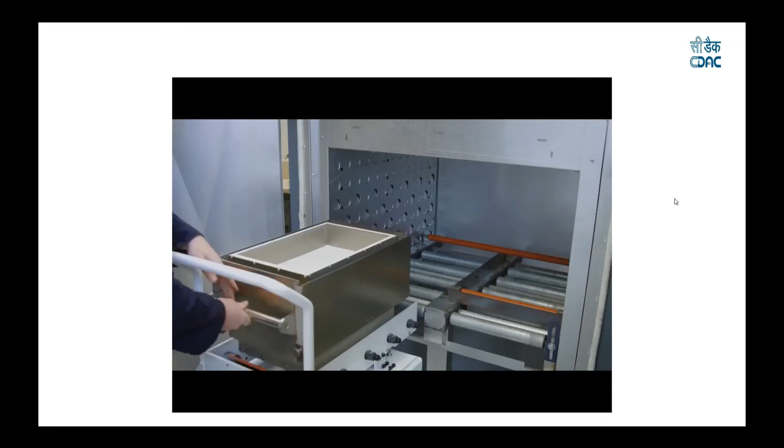When the cycle is completed, the binder is cured by placing the container in a furnace. The temperature and time depend on the type of curing chamber and binder employed during printing. After this step, unbound particles are removed to reveal the part or mold. The sand molds are then ready to be used in foundries. The metal and ceramic parts must undergo sintering, infiltration, heat treatment, or hot isostatic pressing before being used.

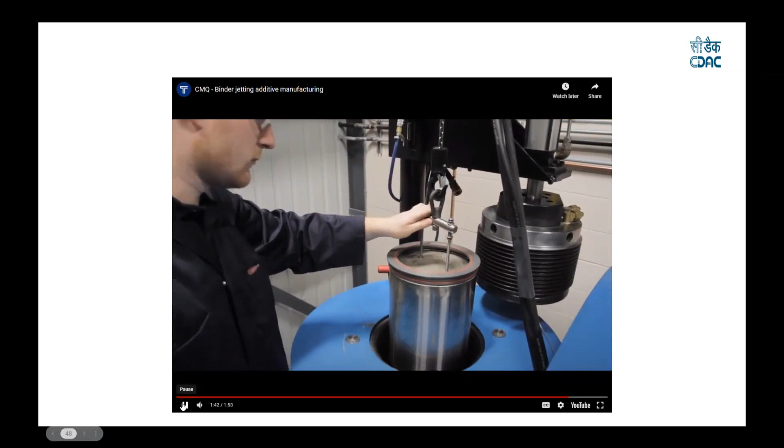So that's how binder jetting works. It is similar to material jetting, but here you jet the binder instead of material. First you deposit the powder raw material, then the binder is jetted and it is solidified using a high intensity or high temperature light source.

After doing that, you keep it in a curing chamber, where it provides high intensity light in all directions such that the uncured or unevaporated binder is jetted off, and that's how the complete process works. If you are printing metal powders, you have to place that in a heating or sintering process so that the partially melted material can be remelted and solidify. That's about binder jetting.

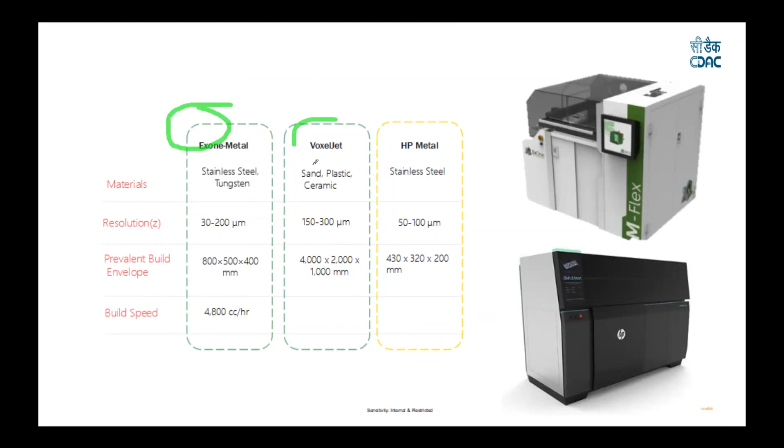Coming to pioneers, there are 3 major players in binder jetting: ExOne Metal, Voxeljet, and HP. The major difference is that in Voxeljet you can use sand also as a raw material. Others are used mostly for metal powders, and the quality is also higher since Voxeljet is used for sand, and these are the build areas we have.

So these are the different classifications we have when going for additive manufacturing technology. If you have any doubts, you can please ask.